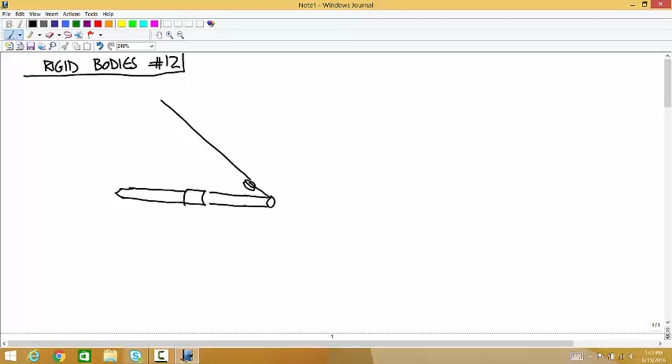This end of the beam is connected to a ball and socket joint at the wall at A. The other end of the beam is connected to a cable that connects to a pulley. That's a separate cable than the one that goes through the pulley, and that one connects to the wall at two spots, here and here.

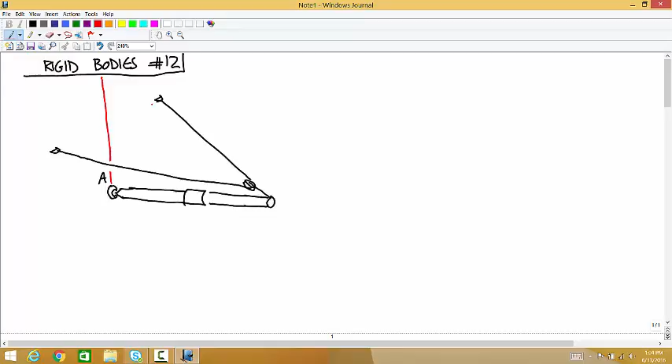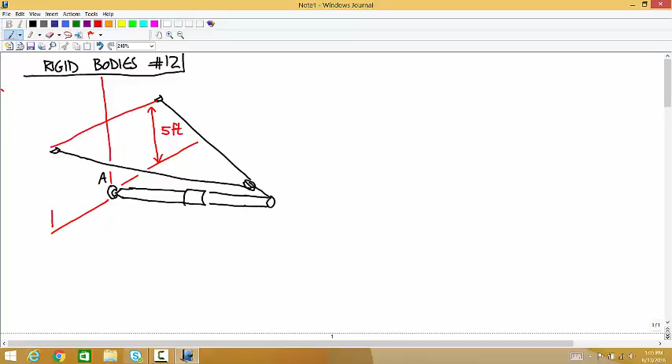Now the dimensions: those two points are both 5 feet above the height of A, and that's 5 feet over here too. Each of those is 4 feet horizontally from the center line where A is.

So there's a lot of symmetry. Then there's a force acting down from this sleeve. The idea of this sleeve is it really doesn't change anything about the problem - you would do the problem the same way if this wasn't here, but I think the intention is to show that since that sleeve is free to slide along the beam, there can't be any component of the force parallel to the path it travels on.

If you took a cable attached to this and tried to pull it this way, it would just move along. So the only force you can apply to this thing is straight perpendicular to the beam. That's how it's drawn anyways, so I don't think there's any point in that really, but they're always looking for new ways to make things look confusing. And that's a force F.

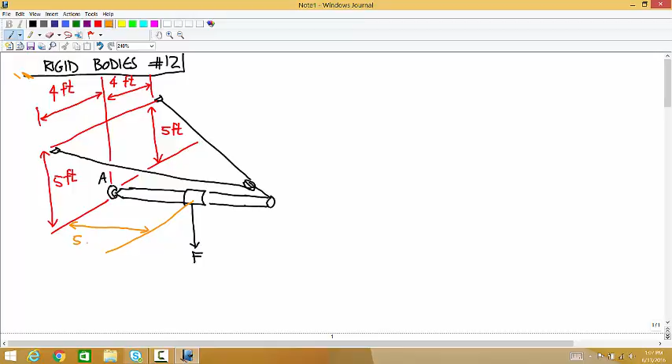Now we need a few other dimensions. That distance is 5 feet, and that distance is 5 feet. And the coordinate system - this horizontal distance here is 2 feet. What are the reactions? We need to come up with these reactions in terms of that variable F.

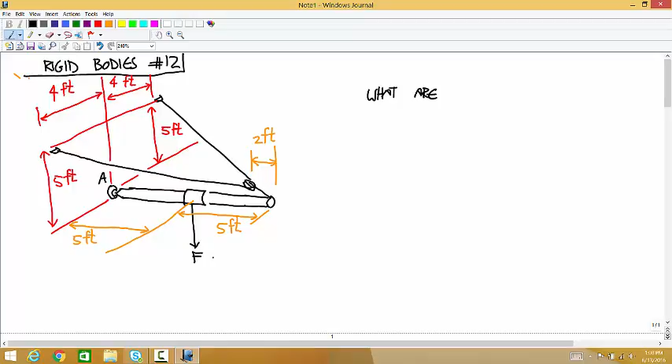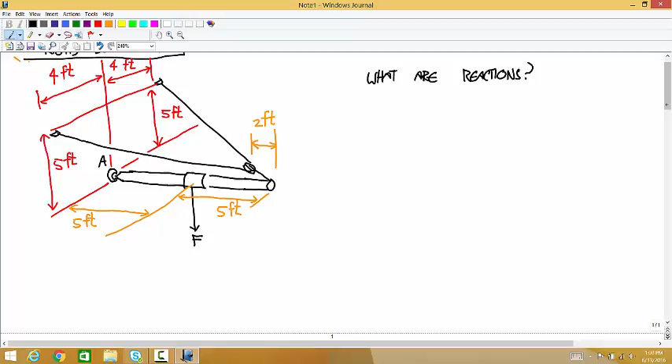Okay, so free body diagram. It doesn't give any mass, right? So there's the object, and there's a downward force of F.

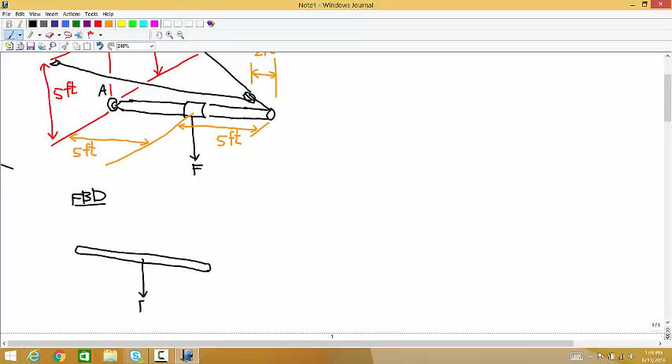I didn't draw the coordinate system, but they did give us one - it's a little different than the one I usually use. The z-axis is up, the y-axis is along the beam's long axis, and that means the x-axis has to be this way for it to be a right-handed coordinate system.

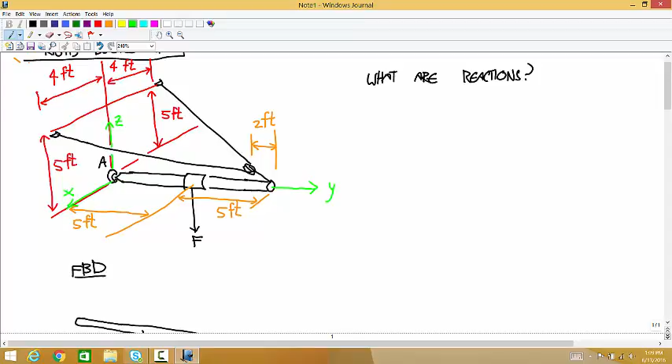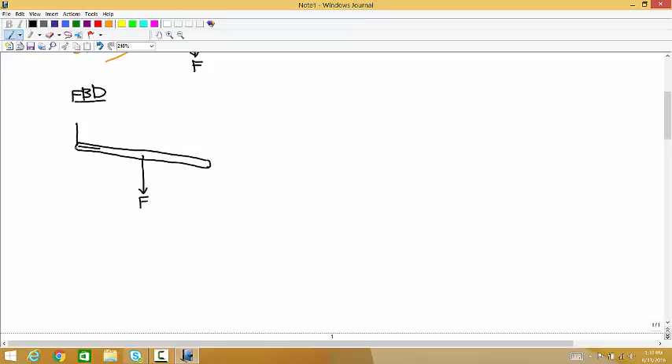Okay, force F acting down. This is a ball and socket joint, so you have an unknown force vector and no couples. And then here you have a tension, call that T.

We want to solve for those two tensions coming out of the pulley, so maybe we should include the pulley in this. If we could solve it the way I drew it right there, we'd solve for that variable T, but that's not what we're asked for - we're asked for the tensions in that other cable that's going through the pulley. So I'm going to include this and the pulley, and then the external loads are going to be tensions in both of those two directions, and since it's the same cable, we can call those both T.

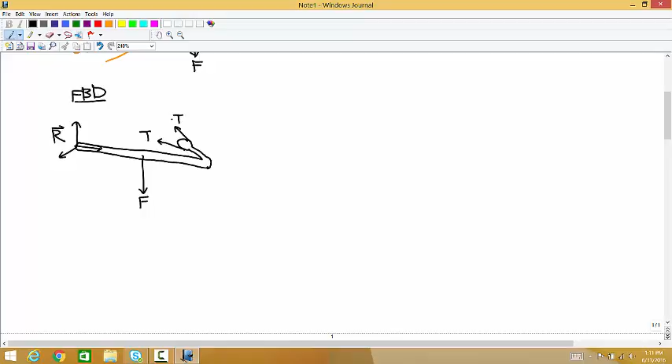The pulley - we don't know exactly, except that looking at it directly from the side, it would look like this. So we can imagine completing the triangle and figure out how far vertically it has to go if it goes horizontally 2 feet. You know what I mean? So here's what we know.

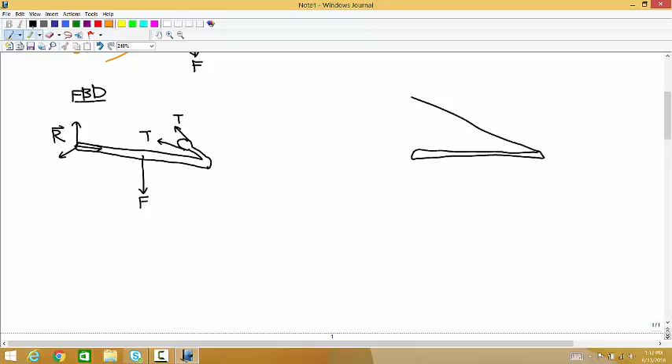If we complete this triangle, this height is 5 feet, this distance is 10 feet. And we know that the pulley is here, where this is 2, and so this has to be 1 because those are similar triangles.

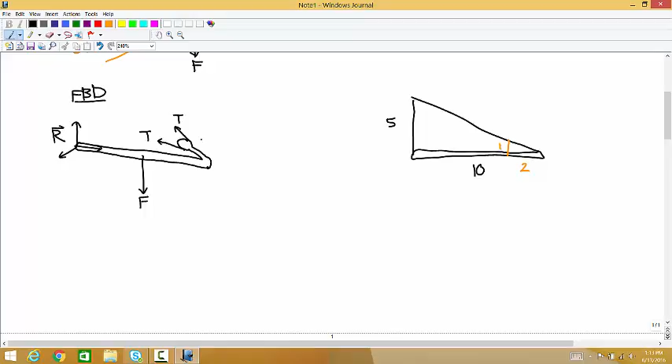Okay, so let's figure out the coordinates of this pulley location, the coordinates of this point at the end. I'll just give them the names that they have in the problem.

A is the origin. B is 0, 10, 0. What, C? Oh, E, yeah thanks. In the problem they call this E, and they call this one D, and this one C.

Okay, so the point E is at, looking at this picture, it's at 0x, 8y, and 1z. So E is equal to 0, 8, 1.

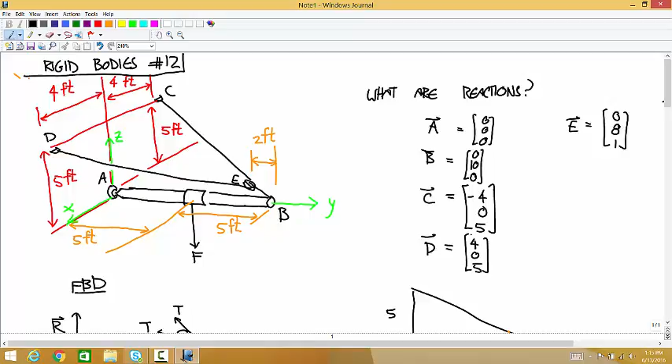Any questions about getting those coordinates? For E, we know that this point here is 0, 10, 0, and it's 2 back towards the origin along the y-axis and 1 up from the origin along the z-axis.

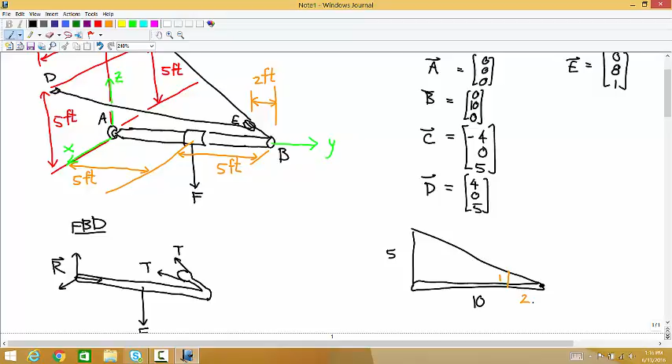Also notice that this F is not something you can solve for. That's the applied force. We're going to get all this in terms of F, which means we have 5 total variables. For us to be able to solve this, one of those 6 equations has to be 0 equals 0.

So first I'll do that force vector R. It's at the origin, so might as well put the about point at the origin. So the r vector is 0. The force vector is Rx, Ry, Rz, and that cross product is the 0 vector.

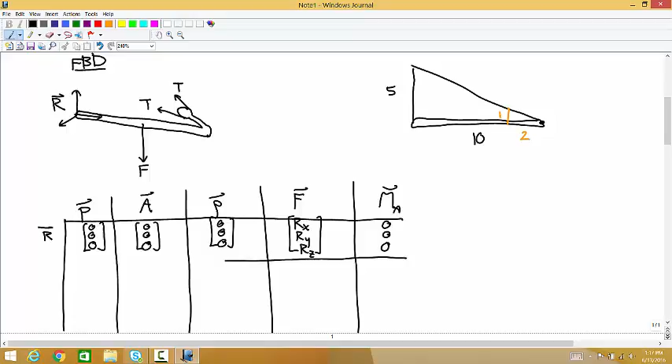Next is that force F, at location 0, 5, 0. So the r vector is 0, 5, 0. The force vector is in the negative z direction, so 0, 0, negative f. And the moment is negative 5f, 0, 0.

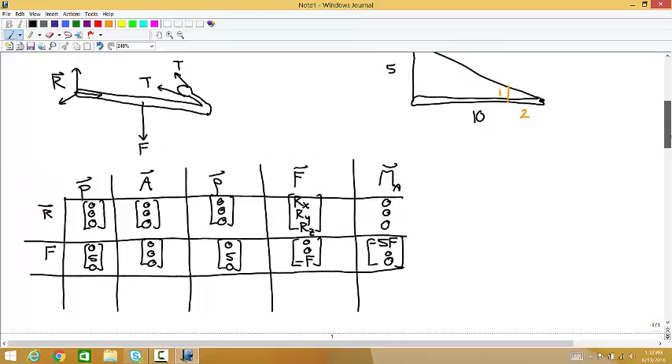And then the last one, I guess we'll do those two separately. They're both acting at the same point, that point E, which we calculated to be 0, 8, 1. This is the force from the cable that goes to D. Do that one first, acting at 0, 8, 1. The about point is the origin, so the r vector is 0, 8, 1.

And now we have to figure out that force vector. How are we going to express the force applied by that cable? Yeah, we're going to find that unit vector. So for cable 1, the cable to D,

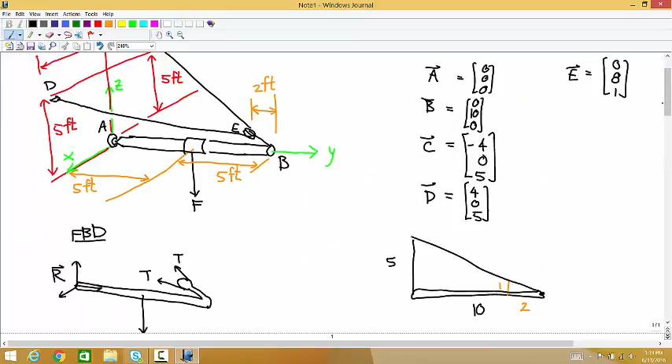a vector in the right direction goes to the point D, 4, 0, 5, and its starting point is 0, 8, 1. Z is the third component, this says negative f in the z direction, that's how they have the coordinate system defined - that's what we usually would call y. So the vector in the right direction, same direction as that cable force, is 4, negative 8, 4.

And so now we need a unit vector in that direction. Can someone figure out the components for that unit vector? Anyone with a TI-89 can just use the unitV function to calculate that. Okay, and then 0.408, okay thanks.

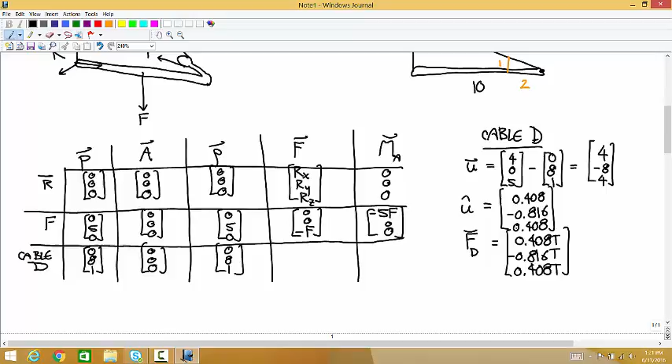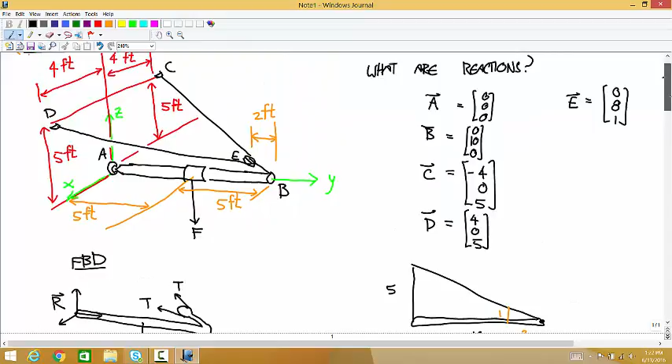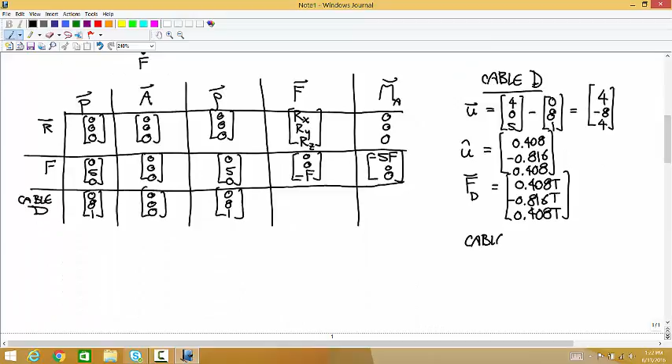And so then the force is just that times T. And then for the cable going the other way, the one going to C, if you can see the symmetry that's happening, it looks like it's just going to switch the sign of the x component. So you can do it the same way, but you'll just get this force vector being equal to negative 0.408t, negative 0.816t, positive 0.408t.

Any questions about either of those? Why, what's the symmetry I'm thinking of there? Well, first of all, you don't have to notice that, you can just go through the steps again and get that answer. To get the vector in the correct direction, we'd be going point C minus point E, which is negative 4, 0, 5, minus 0, 8, 1. So you get negative 4, negative 8, positive 4. The only thing that changes is the signs, just the sign of the x component changes.

Okay, so for cable D, this force vector is positive 0.408t, negative 0.816t, positive 0.408t. Can someone calculate that cross product?

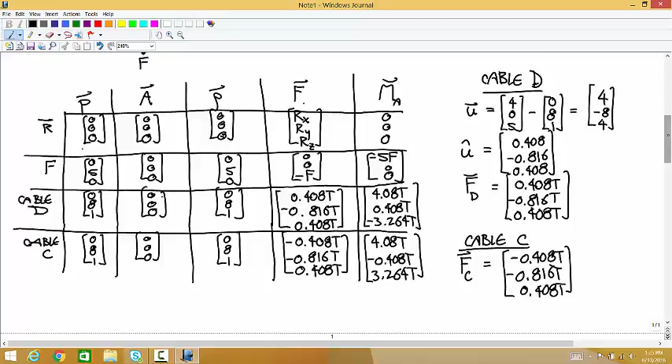So now Newton's second law says Rx, Ry, Rz plus 0, 0, negative F, plus 0.408 T, negative 0.816 T, 0.408 T, plus negative 0.408 T, negative 0.816 T, 0.408 T equals zeros.

I said at the start of working on this problem, one of these equations was going to have to disappear. Oh no, it doesn't disappear yet. It will in this rotational one. We're going to see. Okay, yeah, right.

And then the rotational equation says negative 5F, 0, 0, plus 4.08T, 0.408T, negative 3.264T, plus 4.08T, negative 0.408 - this should have been 408.

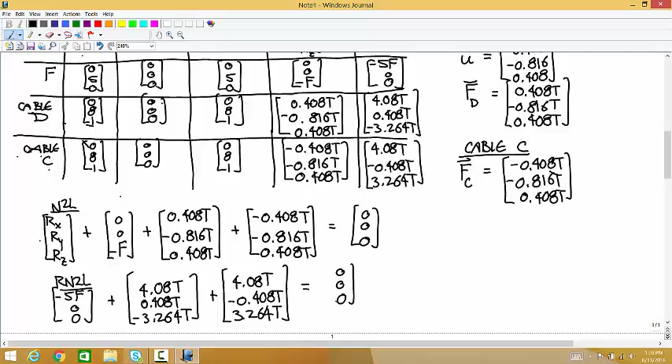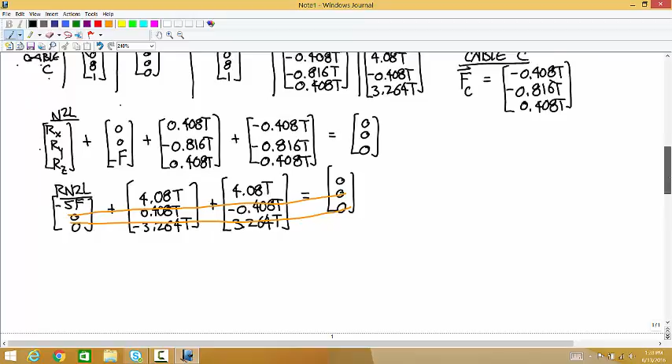And we actually - I said we have 5 variables. We don't have 5 variables because these two T's are the same one. We have 4 variables, so 2 of these equations need to go away, and they do. The y equation says 0 equals 0, and the z equation says 0 equals 0. So we have a system of 4 equations for 4 unknowns.

The first equation says Rx is equal to 0. That one's easy to solve. The second one says Ry is equal to 0. The third... those match, don't they? Yeah. That's equal to 1.632 T.

The third equation says RZ minus F plus 0.816 T is equal to 0. And the fourth equation says negative 5F is equal to 8.16 T. And I got a sign wrong here. There we go.

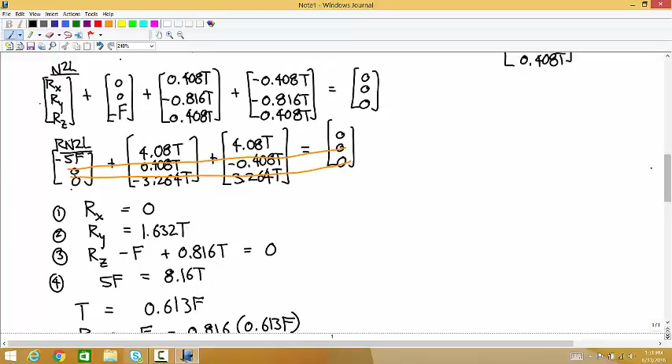And then RZ is equal to 0.816 times this - you know what I mean - F minus 0.816 times 0.613 F. I just moved it there for some reason, because I knew I was going to have to do substitution to express one in terms of the other one. You actually, your calculators will do this with reduced row echelon form. If you just enter the variables in there, it'll give you the answers in terms of the variables. So you didn't have to do this with substitution. For some reason, that occurred to me as the way to do it.

So what do you get for this, for RZ? It should be something less than 1F, right? 0.5F. And then Ry is equal to 1.632 times 0.613F. Oh, F.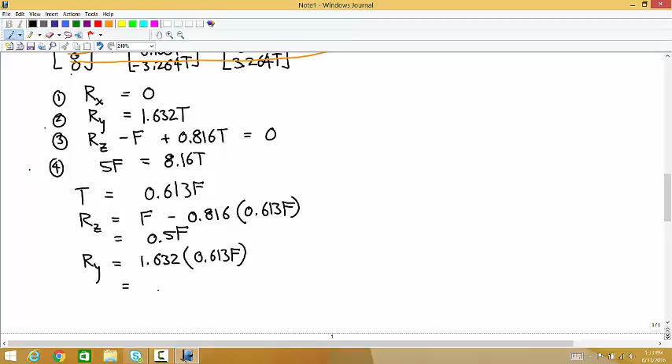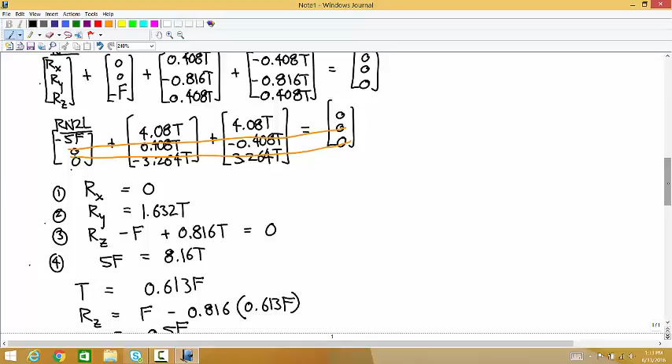So yeah, you could have also done it the same way we always do it. I said that we have 5 variables, but I wasn't noticing that 2 of those variables are the same one. So we really have 4 variables. Oh, you're talking about F. Yeah, F is like the parameter. It's saying like the question is if we apply a force F, what kind of loads are going to happen at the joints? You know, it's saying we don't know what F is yet, but how are those reactions going to vary with F? So then how would you plug that into a calculator?

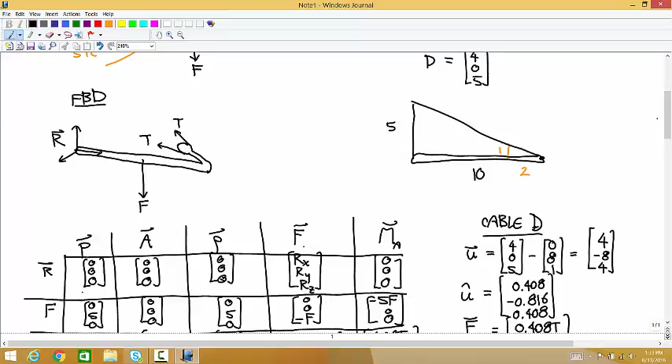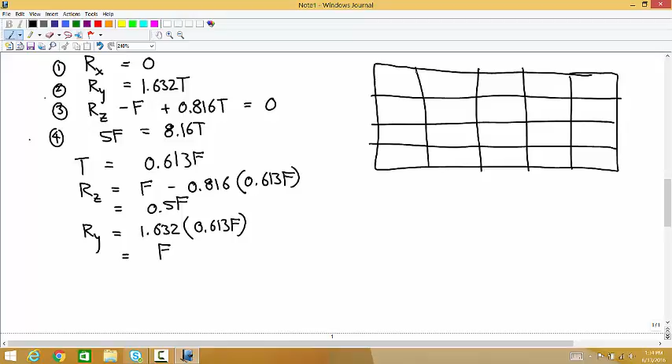Okay, so you could plug it in like this. Right. So here's your system of equations. You have 4 equations. This is the first one, second, third, fourth. And then your variables are Rx, Ry, Rz, and T.

So the first equation says Rx is equal to 0. These are all zeros. Your second equation says 1 Ry minus 1.632 times T is equal to 0.

Your third one says, now we're treating F like it's a constant, not a variable. What? In that second one, right? In what? Oh, yeah. Yes, thank you.

Yeah, so the F is just like it's a number, and it'll solve it in terms of that. So your third one will say 1 RZ plus 0.816 T is equal to F. And your fourth one says 8.16 T is equal to 5F. And you'd enter it in just like that, use reduced row echelon form, and it'll give you answers in terms of F.

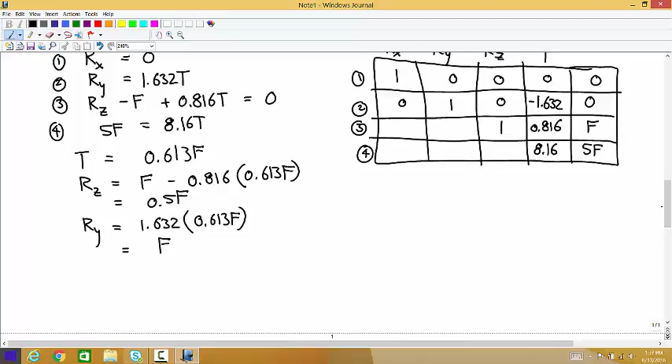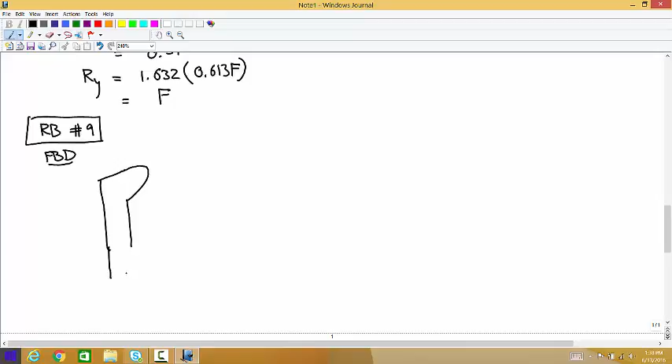Okay, so the free body diagram for this. The body looks something like that.

That one's just a normal force. That's not too tricky. It's weightless, I think. Okay, there's a 5,000 Newton force applied there.

But now the question is, what's happening at this pin joint? This pin joint is a bracket. Imagine, first, the translations. The point that's connected to that pin, imagine trying to move — think of nothing else connected to this body except that pin joint. Can you translate it this way, or this way, or this way?

You can make it — okay, so this is it. Now we're not talking about the rotations, because you can make it do this. But this point that's being gripped by the pin, you can't make it translate this way. You can't make it translate this way because the bracket's holding it in place. You can't make it translate this way because of the pin.

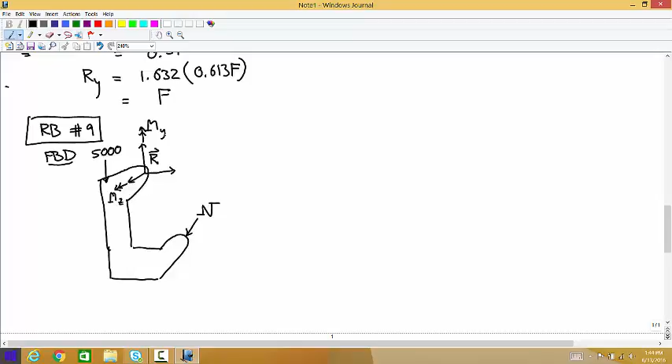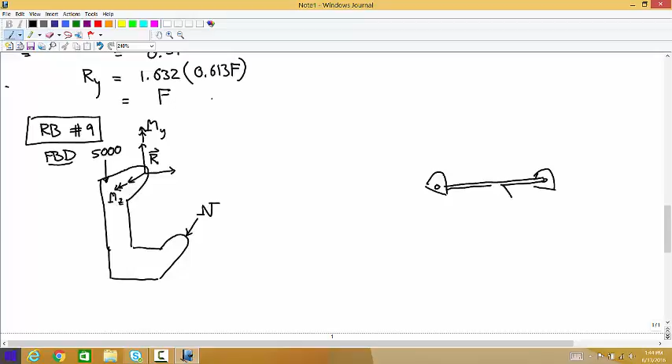I think my best advice is that the only time you don't use those optional couples is when you have two separate pin joints that are coaxial. If any problem where the rotation is allowed by two pin joints that share the same axis, those are the problems where you skip those couples. If you have a single pin joint like this, there's nothing else, no other reaction loads that can prevent those rotations, and so you have to include those couples.

I have a question about the rotation of that couple. So it looks like from the drawing, how do you know that it's at the same Y as the 5,000? Isn't that one of the important things we're supposed to remember?

I just drew that dimension in the wrong place, so you're right about that. That was not my intention for that to be something you had to worry about. That should have given the height of the pin. But shouldn't that matter? I don't think it should, like the height, because you said yourself that if we can move the force vector anywhere along the line of action without changing the behavior.

You can move the 5,000 anywhere. That's right, the 5,000 you can move. It's that pin force that's a concern, because you don't know the direction of that force, so you don't know what its line of action is.

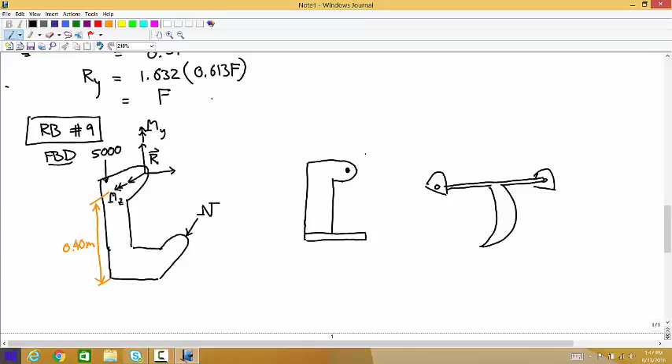So if you draw it from the side, the force applied by the pin is this way, and you need to be able to figure out the distances - there's a force applied here, and you need to figure out all the vectors from one to the other. The way I have it drawn now it looks confusing, but that wasn't my intention. This distance is supposed to be 0.4 meters, and this distance is supposed to be 0.25 meters.

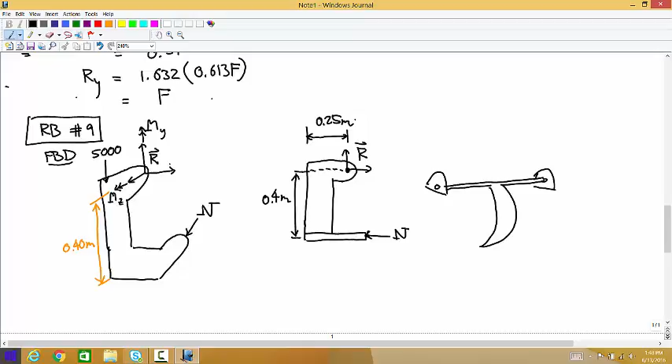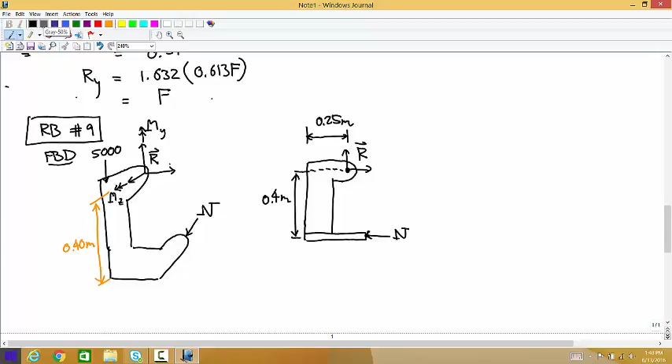Any other questions about that one? Okay, I think I introduced this one at the end of class last time, but we didn't do it - the one with holding up the manhole cover.

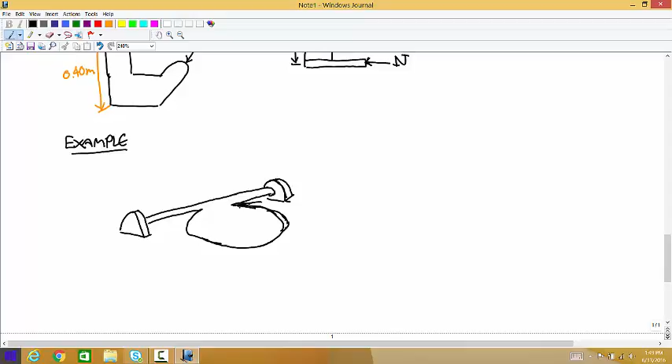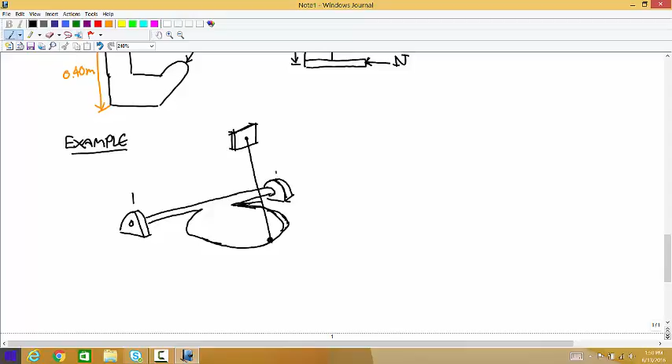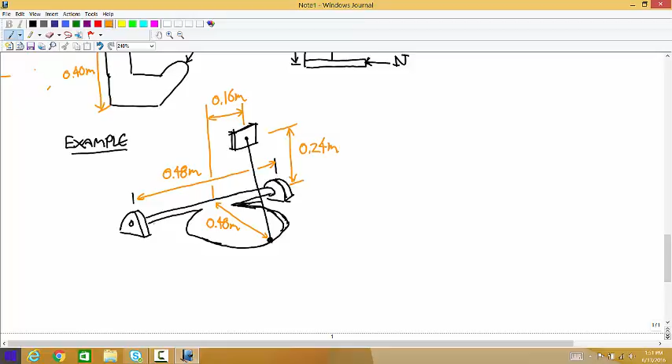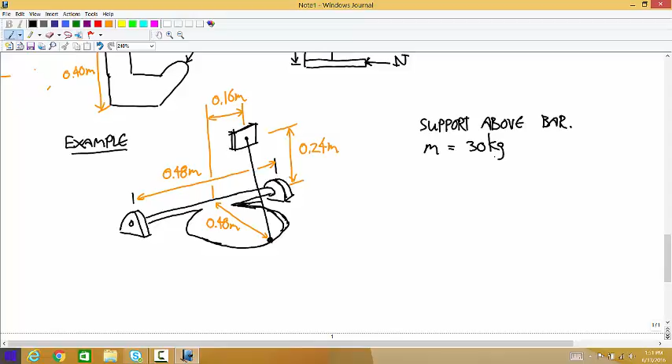There's a cable that goes from the front of the manhole cover to the wall. This distance is 0.48 meters. The diameter is 0.48 meters. The horizontal distance to the support is 0.16 meters, and the height to the support is 0.24 meters. That support is right above the bar. The mass of the manhole cover is 30 kilograms, and there is axial thrust at A, but not at B.

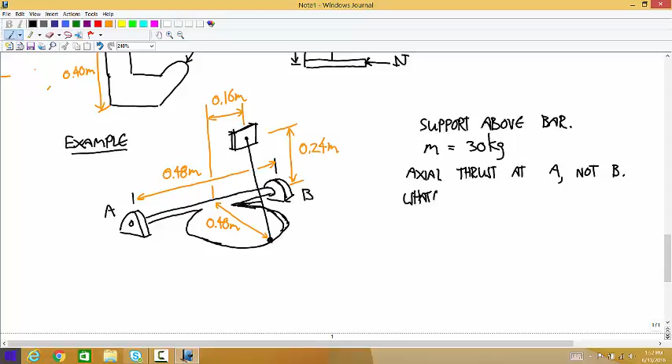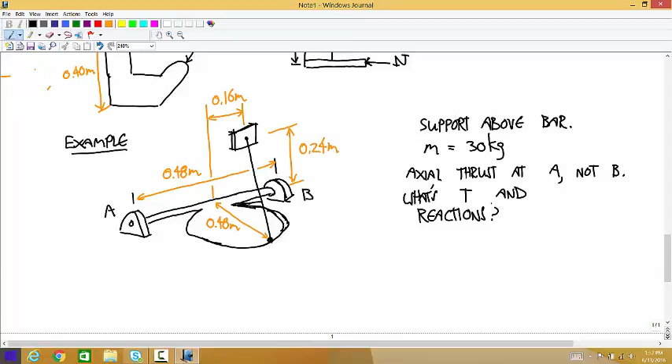We want to know what's the cable tension and what are the reactions at the two pin joints. Any questions about that problem definition?